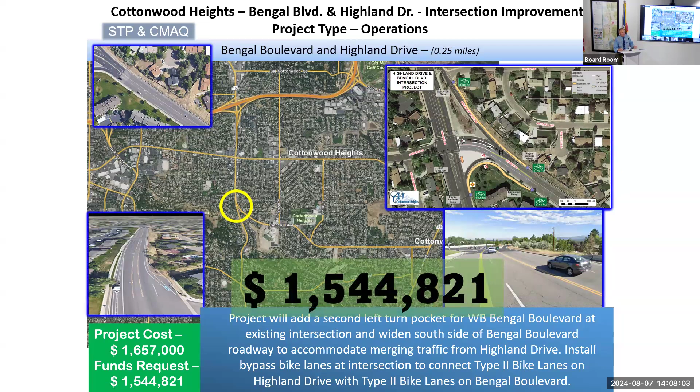There was 1.5+ million approved for the project. The following year, there was a project reviewed by this committee also on Bengal Boulevard within those same project limits, extending a little more to the northeast. This was to address a bicycle and pedestrian route on the north shoulder of Bengal Boulevard as it approached the intersection at Highland Drive. So in discussions with the city, it was identified that we'd tie these 2 projects together.

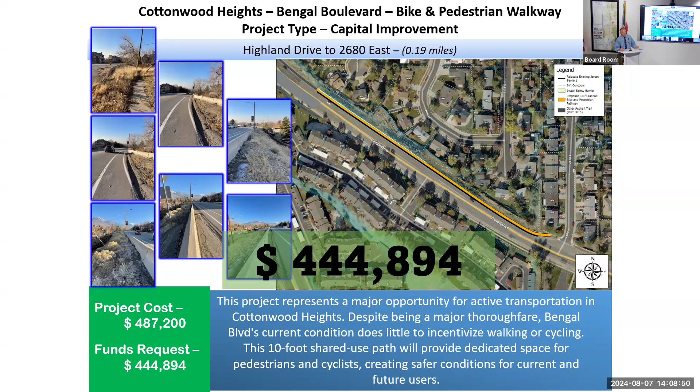This project was approved for $444,000+ in TAP funds. So both these projects were combined together. This project was actually moved into the STP program, using STP funds for both projects, freeing up the TAP funds in the TAP program.

So you may recall that last time we met, we had a wonderful presentation from Cottonwood Heights that identified a new roundabout that was a recommended project. Well, these projects we're talking about go further west. So if you were to turn and face west, you can see the improvements. But then as they progress westward, you can see where we lose the shoulder on the north side of the road, giving us a very narrow pedestrian and bicycle path.

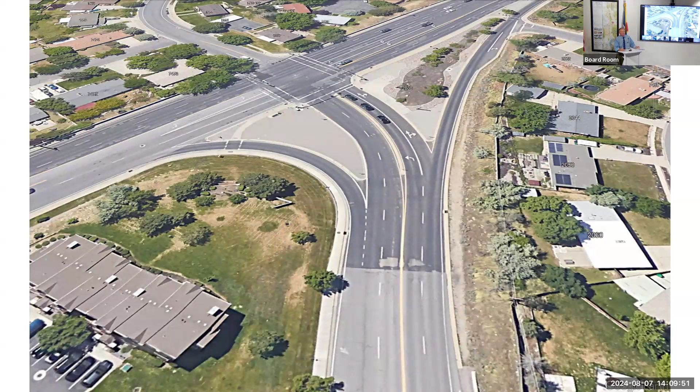Most of it's off the shoulder of the road. And then there's also improvements on the south side, which will be addressed. But then you come into the intersection, which is addressed with the other project. So by tying these two projects together, they began the design work, and up through the 30% design on the project, it was engineered and estimated to cost more than $3 million. It was actually $3.1 million. Currently, with the projects combined together with the local match, we had a budgeted $2.1+ million.

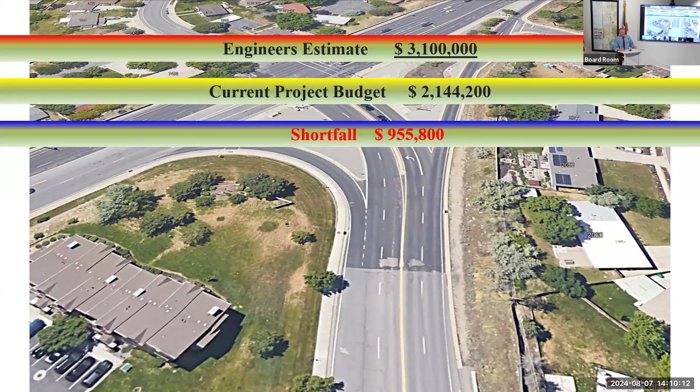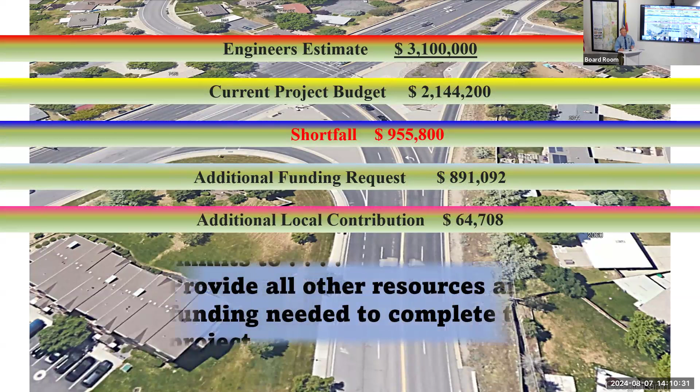That gave us a shortfall of about $955,000 plus. The request from Cottonwood Heights is that we add an additional $891,000 in urban STP funds for these projects, and the city would bring an additional $64,000 plus, with the commitment that they would provide all other resources and funding needed to complete the projects. Any questions on this board modification? Matt, anything you would add?

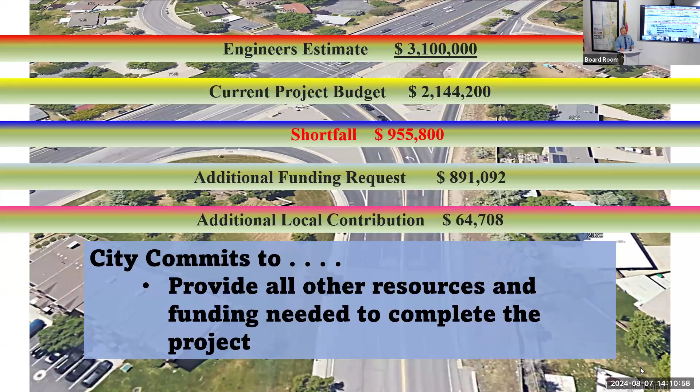No, Ben, I think you've covered all of it, but happy to answer if questions come up. Wonderful, thank you. If it's all right, Mr. Chair, I'll go through the other board mod and then we'll call for the motion.

The other project we want to talk about goes back several years. About 2020, we had an opportunity as a technical advisory committee to review and recommend, through the regional council, a bike path or bicycle boulevard on 13th South. This was the bypass project extending from 2nd East to 500 West. The request for this project was $325,000. The TAC had an available amount of $324,000, and that was the amount approved.

The city proceeded to begin work on this, working with UTA in discussions about providing safe access to the Ballpark TRAX station, as well as safety improvements for pedestrians and bikes in and around the area.

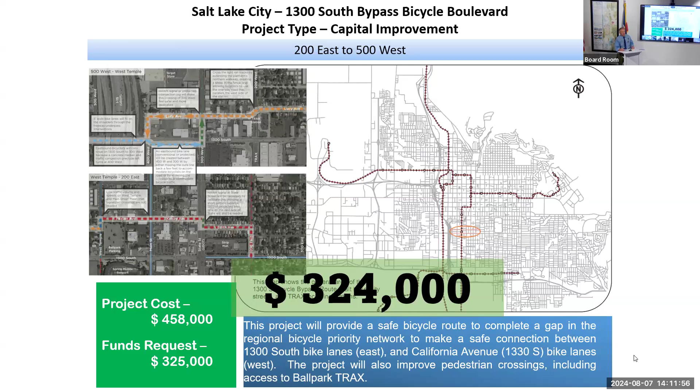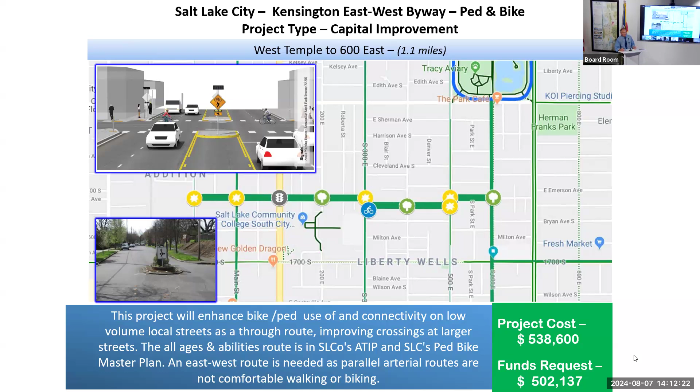A couple of years later, there was a request from Salt Lake City on Kensington Avenue. This was also a bikeway for pedestrians and bikes, between West Temple and 6th East. This project was estimated at a little more than $538,000. The funds recommended for this project was $300,000.

The following year, Salt Lake City approached and was working on phase 2 of the Kensington project, which would go from 6th East to the McClelland Trail. This project was estimated at a little more than $587,000, requesting $410,000 plus, and the TAC recommended the available amount of $350,000.

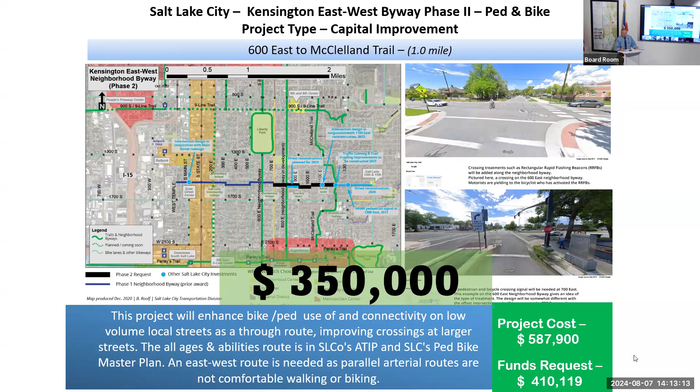Now all these projects have been underway. The byway project on 1300 South had improvements made, but outside of the federal program, because those improvements were able to be done without some of the requirements the federal funds required. Not all of the improvements were done as originally scoped in the project. The intent for this ask is to take all 3 of those projects and combine them.

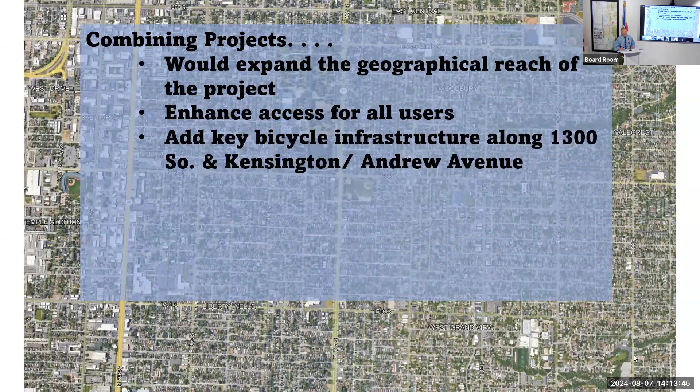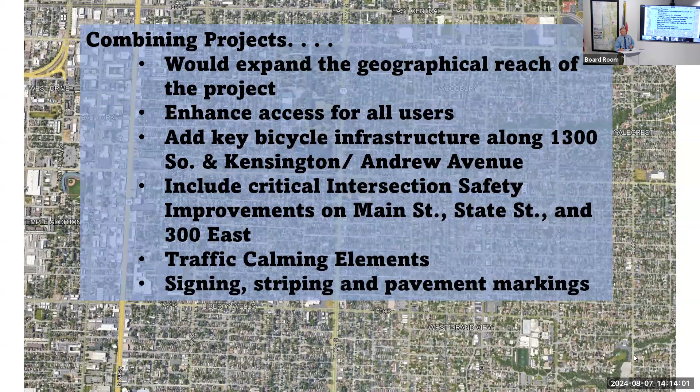That would give us several benefits. It would expand the geographical reach of the projects together, extend the benefits, and enhance access for all users throughout the area. It would also add key bike infrastructure along 13th South, Kensington, and Andrew Avenues. It would include critical intersection safety improvements on Main Street, State Street, and 300 East. It would provide traffic calming elements throughout the area, as well as improve and include signing, striping, and pavement markings.

By adding all of those projects together, with the local match, it would give us a project total of a little more than $1 million — $1,044,000 plus. So that's the board mod for this project. The city would move forward on all of these projects being combined into one if this request is approved. Mr. Chair, that's the request before us.

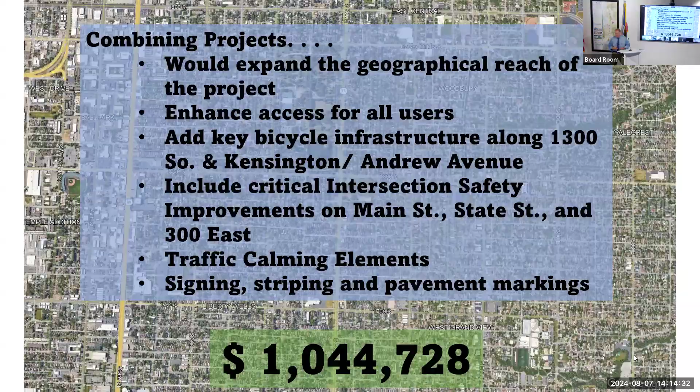Before I open up to questions and a motion, Ben, I have one question. For these combined projects, what was the total available in that project already? Is this an additional ask, or is this just combining all the projects into one? Just combining all projects into one, no additional funds. Okay, so no additional funds — it's basically just a paperwork change to combine all those projects into one, and tweak the scope a little bit. Thank you.

Okay, so we've discussed the two projects. Any comments or questions from those in the room or those online?

Just for clarification on the Cottonwood Heights project, so those two are being combined with — it was the 2.1 million estimate, was that the two projects combined? Yes. And so the request was to combine the two, approximately 2 million there, and they're asking for just short of another million. Ben, I assume that million is available to be added. Correct. And I assume the intent is also to bid those two projects together to help save costs — is it all going to be bid as one project? That's correct, we'll put it under one pen and go from there. Yes.

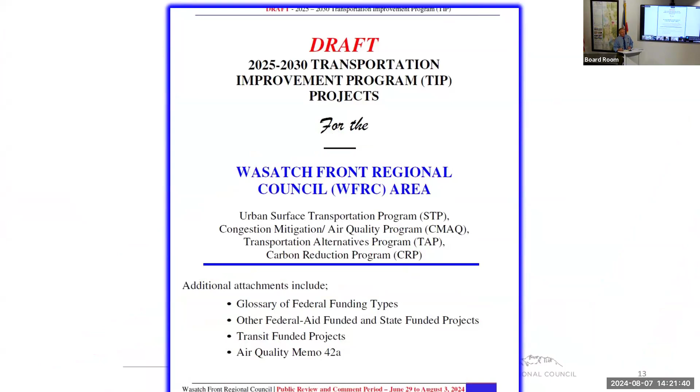In addition to the map, we provided the table that had all of the projects that were reviewed and approved through the Regional Council. That was the 4 programs that the Wasatch Front Regional Council has responsibility to program: the Urban STP funds, or Surface Transportation Program; the Congestion Mitigation Air Quality Program, or CMAQ projects; the Transportation Alternative Program, or TAP; as well as the Carbon Reduction Program, or CRP.

In addition to those programs that Wasatch Front has responsibility to lead, there are projects that the Department of Transportation has responsibility to lead the programming of. Also, there are projects that UTA, our transit agency, has responsibilities to lead out and program funds. And in addition to all the projects, we have the air quality memorandum that shows the analysis determination that the Transportation Improvement Program does conform with an approved regional transportation plan. So all of this information went out for public review and comment, and we received several comments.

And I believe, Wayne, you're on. Would you like to talk about the public comment summary? You bet, thanks Ben. Can you hear me all right?

Yes. All right, so we received close to 400 comments, mostly via the interactive map, but a couple dozen from the open houses as well. We just wanted to share with you a few of the themes in the comments that were made, and let you both hear that and react to it if you'd like. So the themes were: support was expressed for additional safe bicycle infrastructure. Requests were made to safely accommodate bicyclists and pedestrians in several roadway projects. A number of comments were made in favor of FrontRunner strategic double tracking.

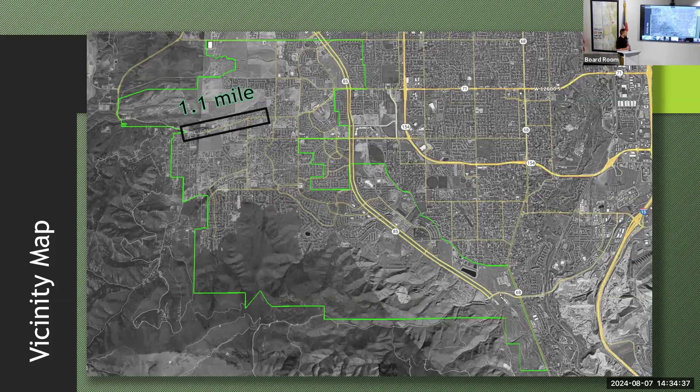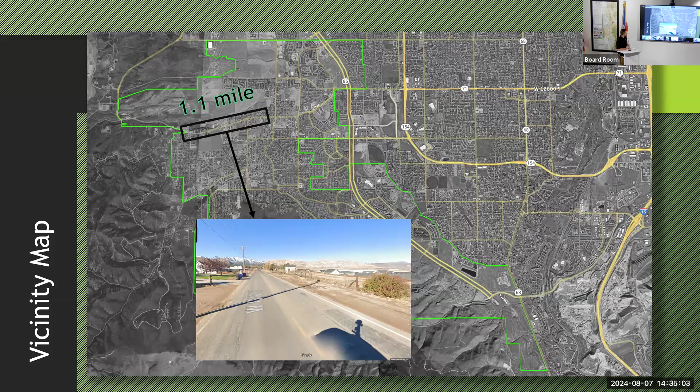Here's a quick preview of what that road looked like in the original condition. It was a 2-lane road, and in some cases it's been named Herriman Highway or Bacchus Highway as it comes around, but we've recently renamed it with this project to Herriman Main Street all the way out to Butterfield Canyon. On the Tooele side, you can connect through Butterfield Canyon to Settlement Canyon.

Just a quick timeline so you can see how long this project took. I didn't include the full design time, but we began acquiring right-of-way in September of 2022, and the final design was done in November of 2022. We then went out to bid and received bids in January of 2023, and construction began about a month later.

You'll find out about this in the presentation - we did have some hiccups in the right-of-way acquisition process. As a spoiler alert, we did have to use eminent domain. Our city council voted to pursue eminent domain, there was a court hearing, and eventually we gained occupancy, but it wasn't as quickly as we had hoped for the project. That just means we could now work on the land we needed to widen the road. Eventually, while construction was going on, we did settle with the property owners, and just this month we completed the project.

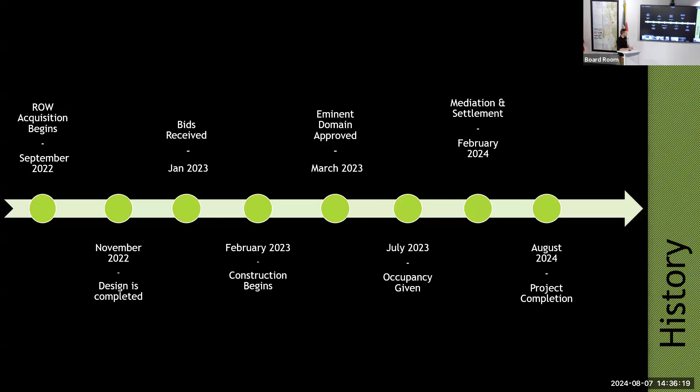Hopefully this works - just a quick before video to give you some context. Our GIS department has a drone that we like to fly up to look at some projects.

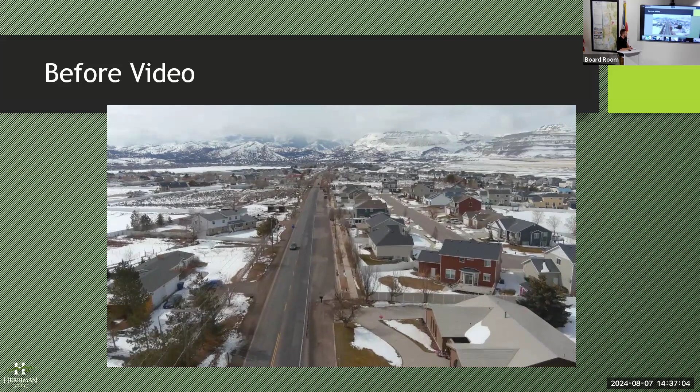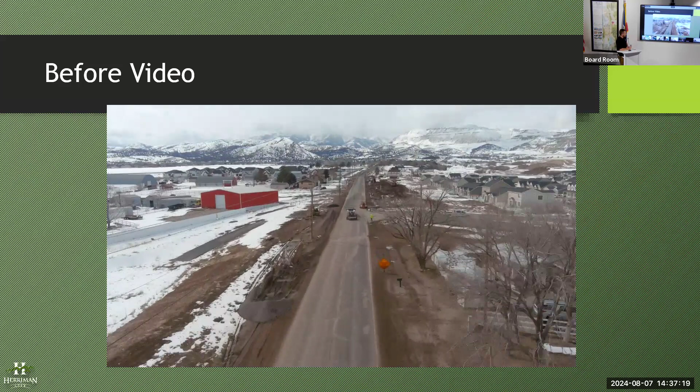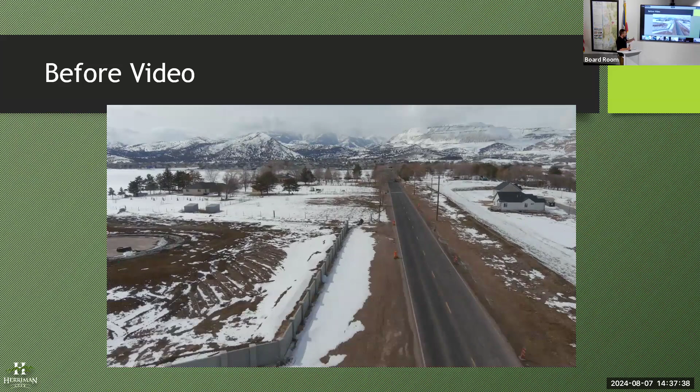This is the video before. You can see it's a 2-lane road, no curb, gutter, or sidewalk. It's a mix of land uses out here - residential, agricultural, not much commercial, with different densities throughout, some larger lots, some single family homes. The interesting part is that those power lines you see had to get swapped to the north side of the road. It's a pretty long road, about 1 mile in length, and a pretty significant project for us. You can see some newer development in the middle of the project, but on both ends it's more rural, historical land use. We don't have to watch this whole video, but just to get some context of what it looked like before.

Originally the design and our master plan was for what we call a major collector road - 80-foot right-of-way, 3 lanes with essentially a 10-foot shoulder, but that 10-foot shoulder is used as a buffered bike lane. At intersections it turns into a shared lane and a right turn lane, then 5-foot park strips and 5-foot sidewalks with landscaping. As you saw in that video, there's a lot of power infrastructure that we were hoping to relocate underground. We got to about 30% design and realized the cost was quite significant to do that original concept design.

So we went to our city council and gave them some options, and they chose to skinny up the road a little bit. So we're at a baseline, 68-foot right-of-way, which is our minor collector width. Same 3 lanes as far as capacity goes, and then bike lanes, but they would no longer be buffered bike lanes, just standard bike lanes. This is a design speed of 40 and posted 35, just for some context.

We kind of updated the landscaping, and due to budget, the decision was to not bury the power underground. It would still require relocating, but it would stay aerial rather than going underground. So that's about 30% design. We had a consultant hire a construction agency to give us a mock bid at that point, so we really dialed in what the costs would be before the bid.

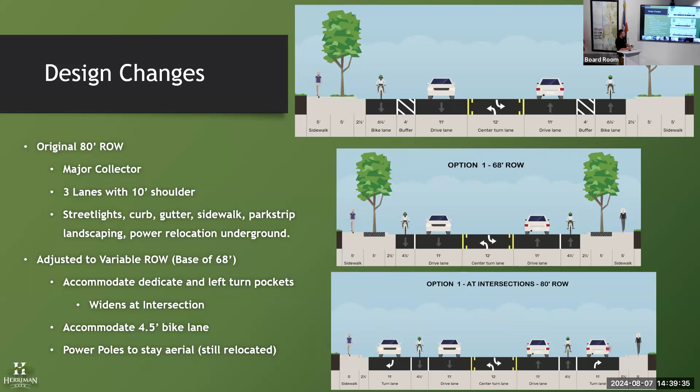So some major issues or goals of the project: there was a brand new elementary school built in this area that we were hoping to get sidewalks to. It was a new school in a new area that really had no great path to the school. So a big part of this project was to build those sidewalks to establish a route to the new elementary school.

There were existing private irrigation systems, two private irrigation companies that ran along this road and in the right-of-way, that we had to work with and rebuild their systems. I won't go into much detail, just that it's an interesting situation anytime we're building someone else's infrastructure with our money. There's always back and forth. They want something better than what's existing, and we say, hey, you had this in the ground, we'll give you this for this reason. We're disturbing your pipe, so we'll give you as good or better than what you have today. And then, right-of-way acquisition was the biggest hurdle or obstacle in completing this project.

And then also utility relocation, so that was power and communication relocation.

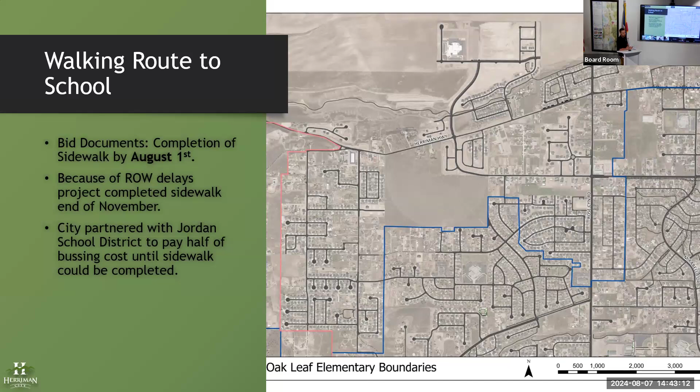The goal was to start construction in January and have the sidewalks built by the time school started the next school year in August. That did not occur. Because of our right-of-way delays and utility relocation delays, a good portion of the sidewalk was done, but a good portion was not. So we actually had to partner with the school district in getting kids to school. The city participated with the school district to provide buses until December, so from August to December they continued those safety shuttles. That was a concern and an issue we had to figure out, how to get kids to school while construction was still going on.

So just to get an idea of the acquisition on this, there were 22 parcels that we actually had to buy land from or purchase property. 4 of those are the ones we ended up having to use eminent domain on, and they were all part of the same family.

The big issue we ran into is that there were a couple of property owners, and really one property owner who owned multiple parcels, that we could not come to an agreement with. So it came to a point where staff and our city council recommended moving forward with eminent domain, which I've kind of just put down the requirements for.

There's a lot of requirements before you can even consider or put up for a vote on eminent domain when negotiating right-of-way. One is to provide a written notice to the property owner and the property brochure that the state has produced, which guides property owners through their options before eminent domain takes effect. There has to be at least 30 days of good faith negotiation - you can't just jump into it without negotiating with the property owner. There's also a 4 options letter that goes over, okay, we're at the point of eminent domain - here are 4 options we can proceed with, and that discusses things for the property owner.

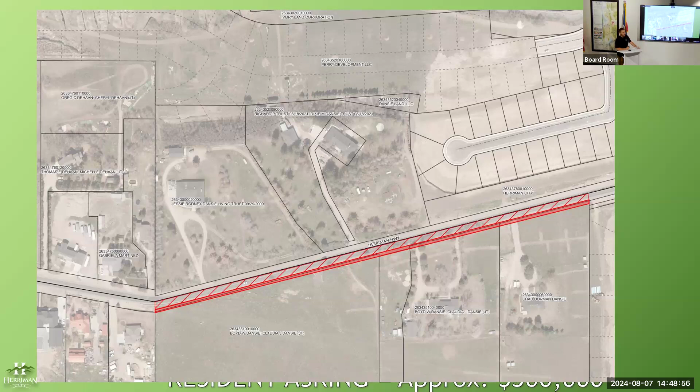In our case, it wasn't much of a comparison. That gap—we're offering $25,000, that's where we think we're at, and they're wanting $300,000—the legal fees didn't really come up close to making up that gap. So for our council, it made sense. The project, we wanted to get these sidewalks in before school started and address that safety issue. There's more reasons than that, but that's one of the reasons we went this route.

Another hiccup or slowdown in our construction schedule was power relocation. The group probably knows a fairly good amount about power setup. They have a distribution line, which is their lower voltage that goes to the homes, generally on smaller wooden poles. Then there's a transmission system, generally higher voltage with bigger steel poles. So we had to relocate both.

Distribution ran along the whole project, as you saw in that video. So we had to relocate pretty much that entire line and work with Rocky Mountain to do that. As most cities, we have a franchise agreement with them that helped guide that process on what was paid for, who would move what, and the timelines. But in addition, there were other utilities also on those poles—Comcast was one that we had to relocate.

The transmission side is a little harder to get done, as you can imagine—higher voltages, heavier loads, much larger infrastructure for the poles. We thought we were good because we got started about a year before this project even got thought about. In the end, that transmission pole still delayed the project and actually just got completed about 2 months ago. That was a combination of working with Rocky Mountain Power's transmission team and Comcast, who were also on this line.

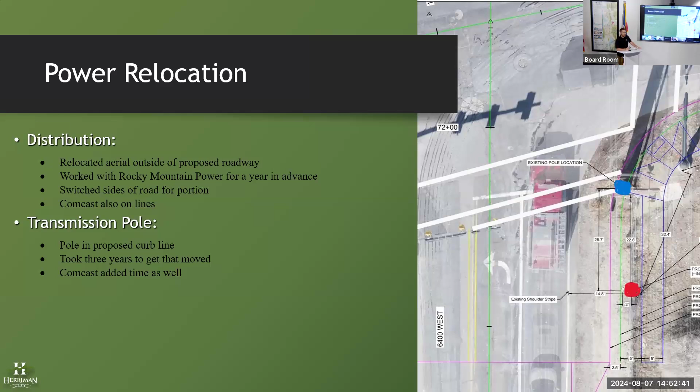Rocky Mountain Power told us, hey, we can't work on transmission lines during the summer—the loads are too heavy with air conditioners going. So we had to wait till fall. They came in the fall, put in the new pole, and transferred the line. Then they ended up putting the wrong type of attachments on that new pole, so Comcast couldn't relocate onto it. We had to wait 6 months for Comcast to get a new pole and relocate off. So, long story short—when dealing with the transmission side of Rocky Mountain Power, plan a long time. About 3 years in total for us.

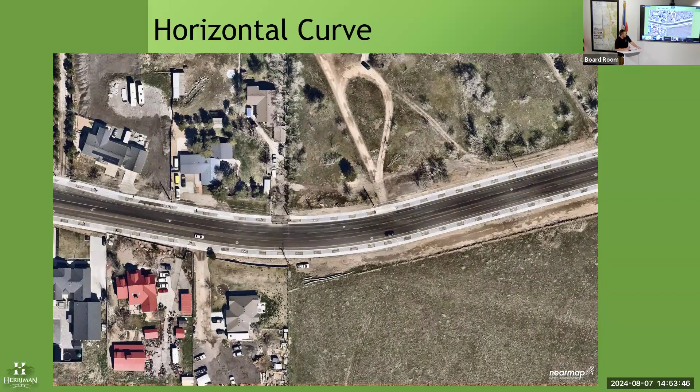And then, yeah, just one more video to kind of go over what the final product ended up looking like after about 2 years of work.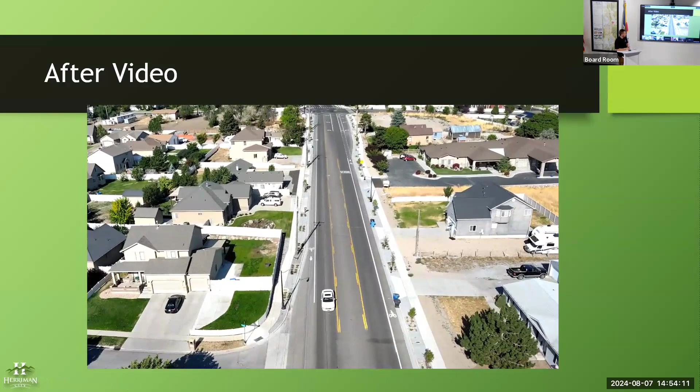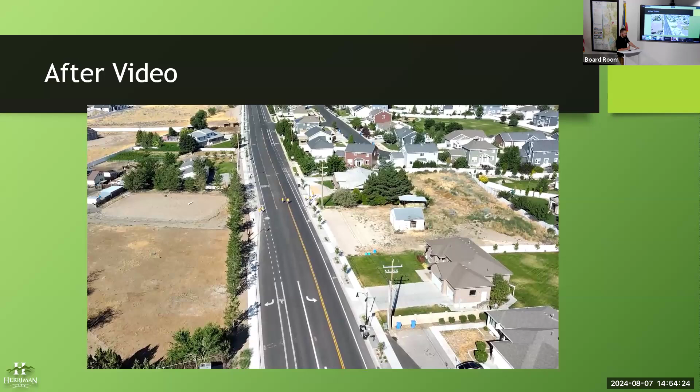I forgot to mention, you can see here when we switched to the slimmer, skinnied up road that eliminated the 10-foot shoulders and went from buffered bike lanes to standard bike lanes, we did end up widening out to that original 80-foot right-of-way at intersections, where we would give a dedicated right turn lane and dedicated left turn lane. So it wasn't like we just skinnied up the road the whole way through.

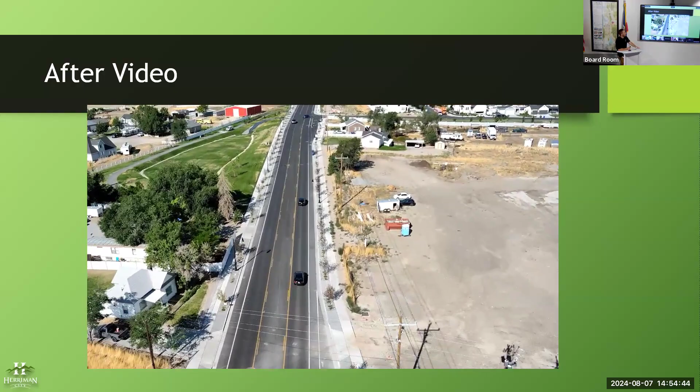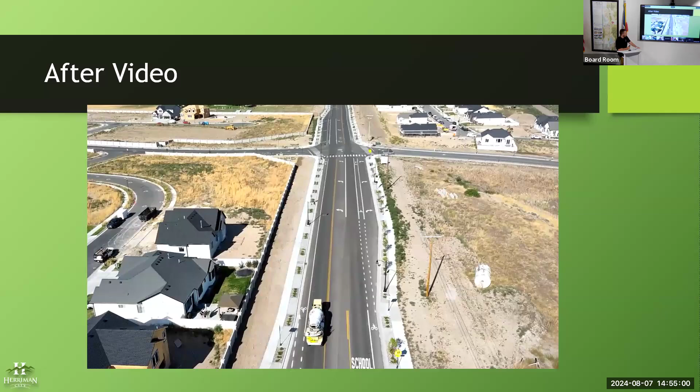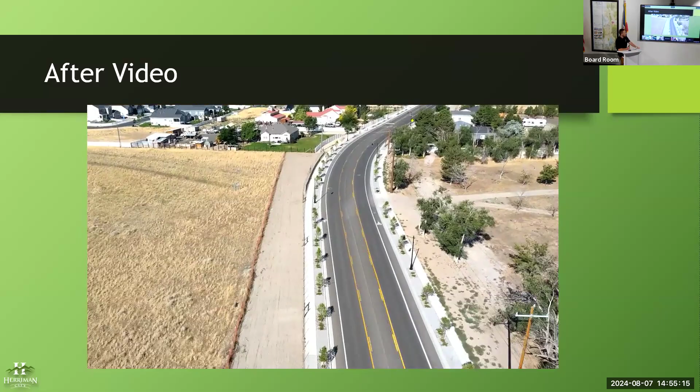There were areas where we added a right turn lane or a left turn lane at intersections, and that center turn lane turns into a left turn lane and a right turn lane, and then the bike lane goes through. So we tried to keep capacity the same as if we'd built it with an 80-foot right-of-way versus a 68-foot right-of-way, but then expanded at intersections to make sure our queue lengths weren't delayed or slowed compared to having the full 80 feet.

So yeah, that's about it for the project. There are a couple of things, as I mentioned, lessons learned from this project.

For right-of-way acquisition, obviously no one anticipated us having to use the eminent domain process, but it does take time. It is effective - it did get us the ability to work in the area, but it took a while. It wasn't a quick process - between the city council decision for being able to work, and then actually getting a decision from a court, it's not a quick process.

But for us it was necessary, and without it we'd still be struggling on some of those issues. And then for power relocation, I went over this - for the distribution side of things, it took about a year to get Rocky Mountain Power to relocate those, and then transmission poles took us 3 years. That took a lot of babysitting, daily check-ins, checking in as often as we can. But I'm sure the other partners in the room have dealt with similar situations.

And then this one - because we had so many homes on this road, about 60 driveways that tied into the road, we had our consultant develop a property owner exhibit for each property owner, which was super helpful in acquisition but also during the project to say, hey, this isn't the final state, your final state is what's on your paper. That meant your driveway is going to have a little bit steeper slope because the road came up a bit, or your sod's going to tie in here with a slope, or different ideas about landscape restoration.

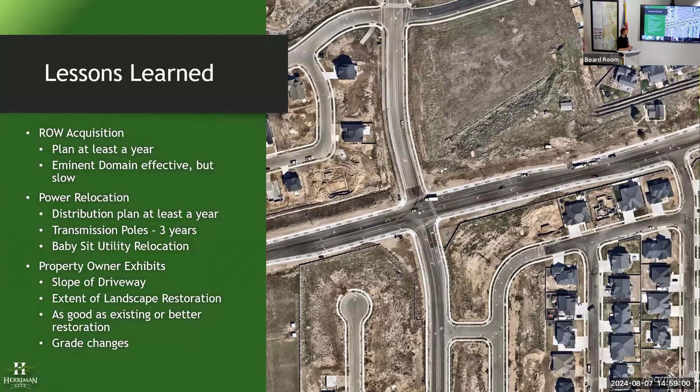So that's all I've got, but I can answer any questions on the project or in general.

Mayor Burton has a question. He's wondering if you've installed no parking signs along those bike lanes. We do not yet. That's a concern we're looking at and possibly installing. There's a thought from the city side that we'll target where the issues are. It's about a mile-long road, so we'll target wherever we see issues rather than doing no parking the whole length on both sides. If we continue to see those issues, we would pursue no parking in those areas.

And you have another question. Chris with Murray is wondering who did your design. Our consultant on the design was WCG, Wall Consultant Group. They did our design, and we also used their right-of-way agent to help us acquire property.

There's a question about undergrounding utilities, and I think there was a lesson learned in that. We didn't end up undergrounding the power as we talked about, since it was quite expensive. Like most cities, we have a franchise agreement with Rocky Mountain Power that says if their infrastructure or poles are in our right of way, they'll relocate at their own cost to get out of the way of our project, keeping their lines aerial. But as soon as we ask them to go underground, the city has to cover that betterment cost. So we learned it's very expensive to do on a long area, and we focused only on where intersections, traffic signals, or important crossings were, rather than undergrounding the entire line.